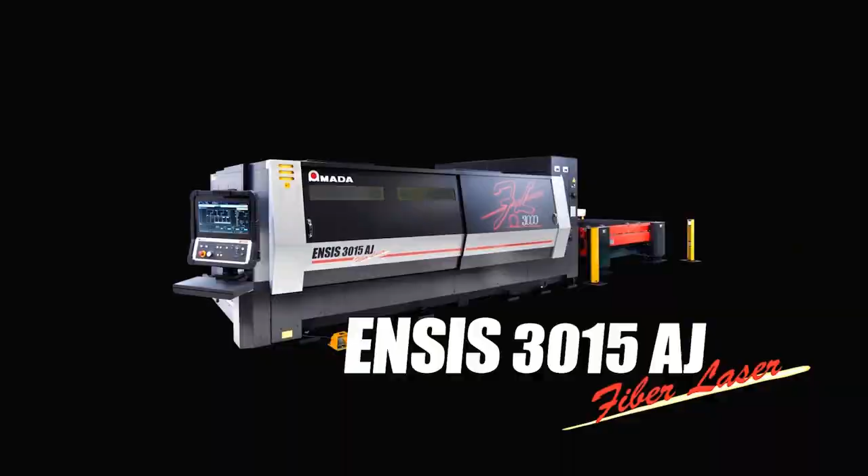IoT-compatible machines bring new manufacturing efficiencies through sensors installed in the machine that monitor changes in real time and send data to the CNC, AMNC for analysis.

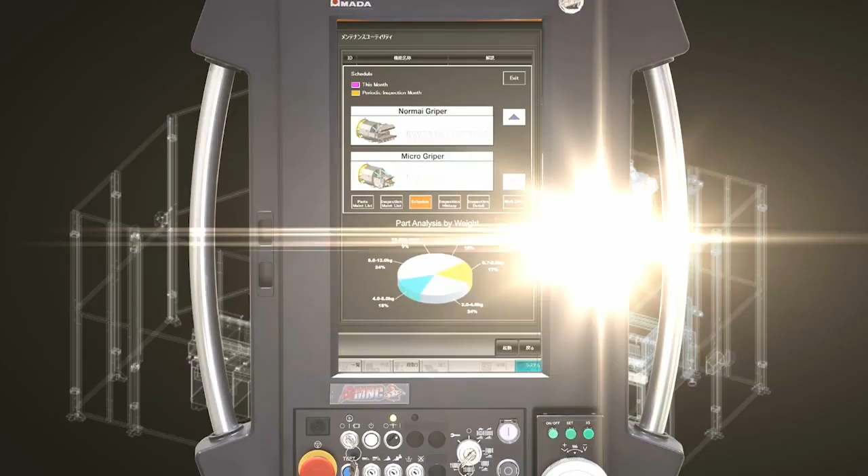The machine autonomously reacts to the analysis, reducing accidents and allowing production to continue without stopping.

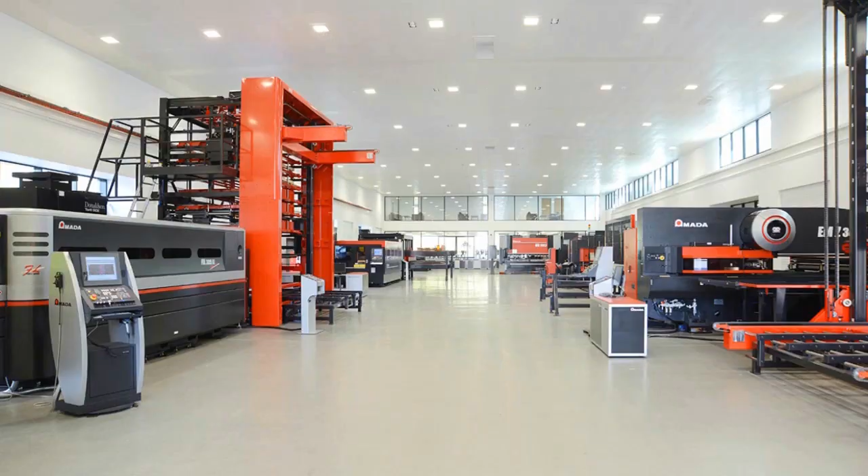We also use AR technology to display factory operating status as digital information to visualize the factory as a whole. This will realize a smart factory which is resistant to fluctuations and seeks out the greatest profit.

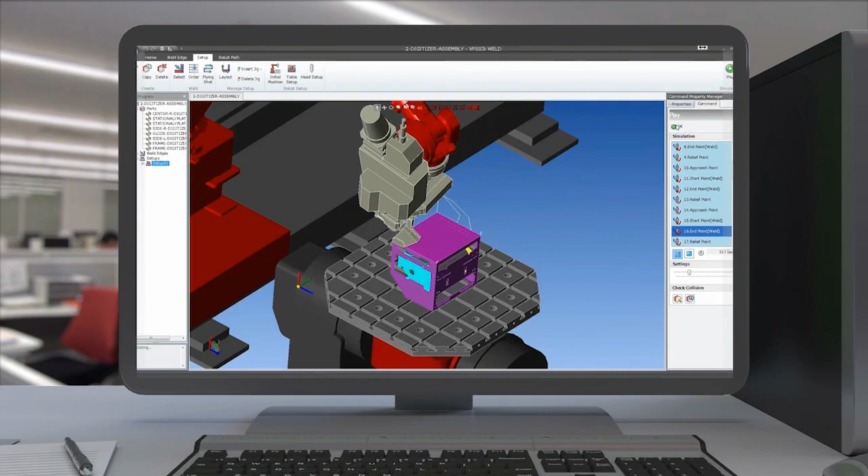Furthermore, before processing begins, VR technology is used to simulate processing from CAD data and optimize the program created. Stable quality and cost reduction are achieved by choosing the optimum processing method at the programming stage and eliminating waste on the shop floor.

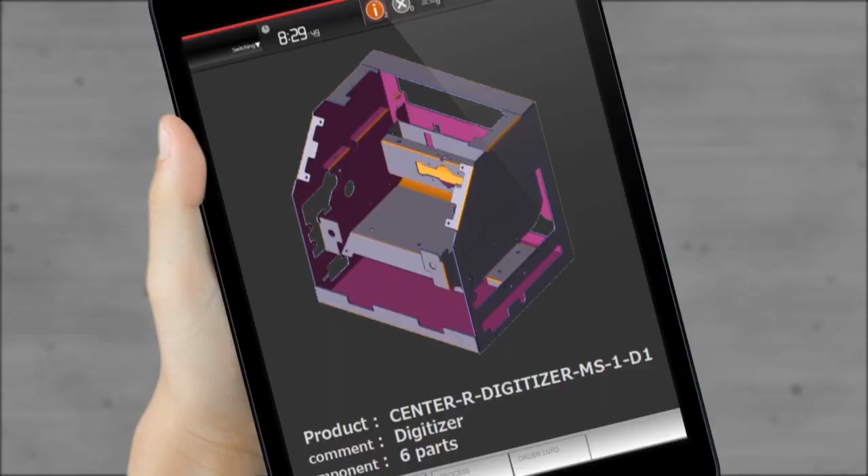Operating and processing data are accumulated in the server via the network. The manufacturing process is visualized, making it possible for everyone to perform high-quality processing.

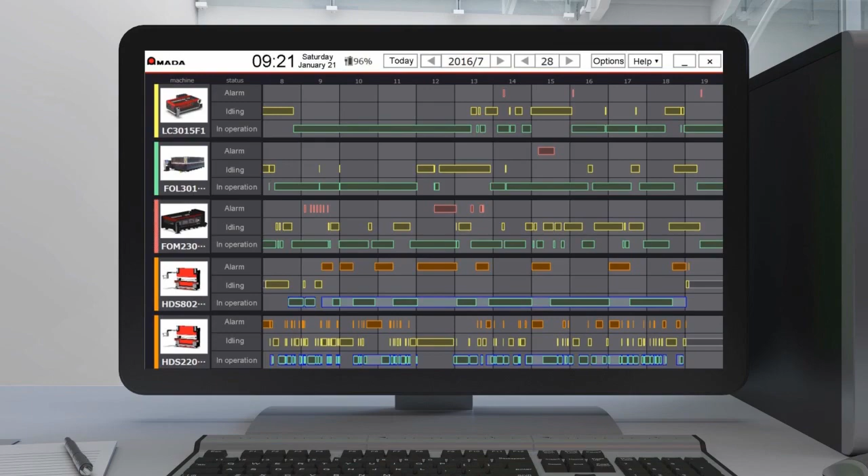During factory production, we can grasp the schedule and the load situation of each process in real time and be able to give accurate and speedy instructions to various problems as they occur. Productivity improvement is expected by receiving a visual operating status of the factory at any time, from anywhere.

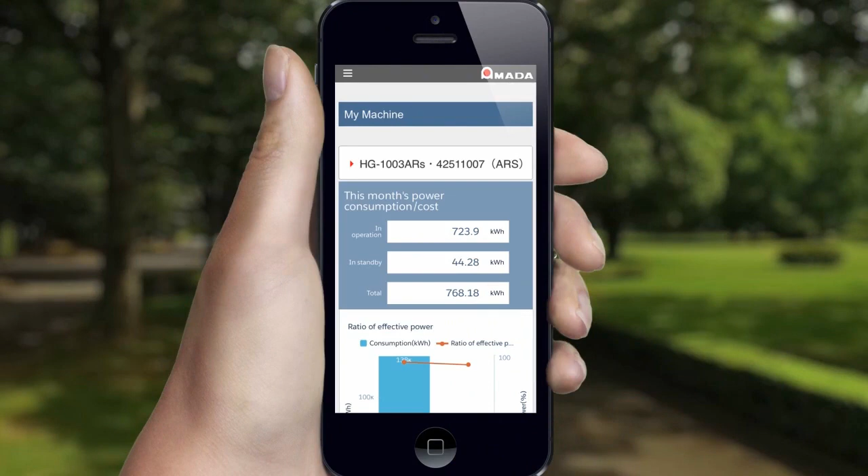Furthermore, by accumulating machine operation and maintenance data in the cloud, we create a large database for analysis. AMADA can also centrally manage the operation status of machines compliant with IoT as a support center in real time.

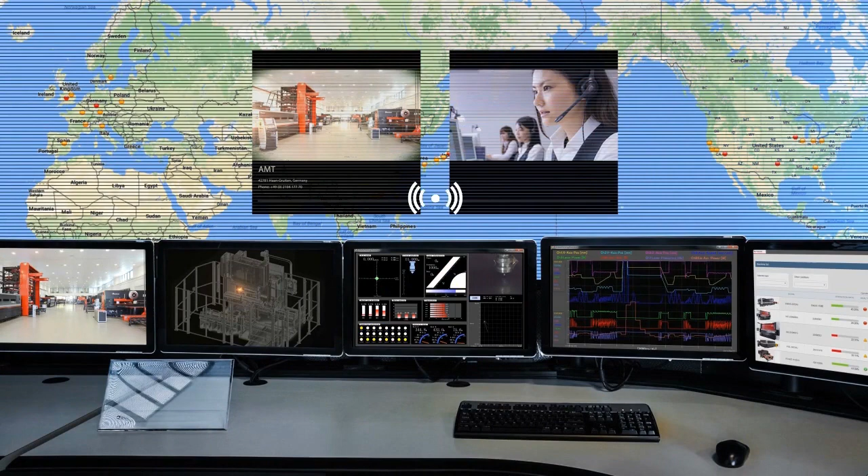In the event of trouble or failures that cause the machine to stop, production can be restored by remote connection, or service staff can be arranged to quickly eliminate obstacles.

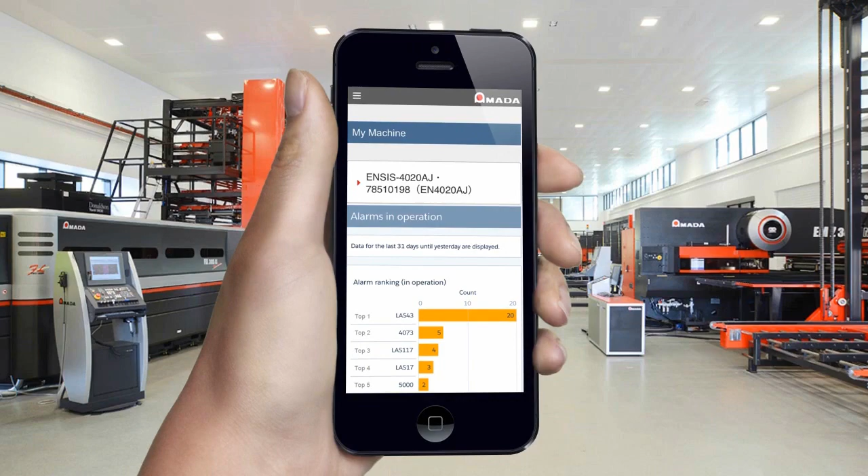Also, the contents of prediction and prevention analyzed by AMADA will arrive at the customer in real time, and we will also notify you of the response to obstacles.

In addition, we can find the optimum processing conditions using the large database from AMADA's processing, and we can offer consulting to improve operations.

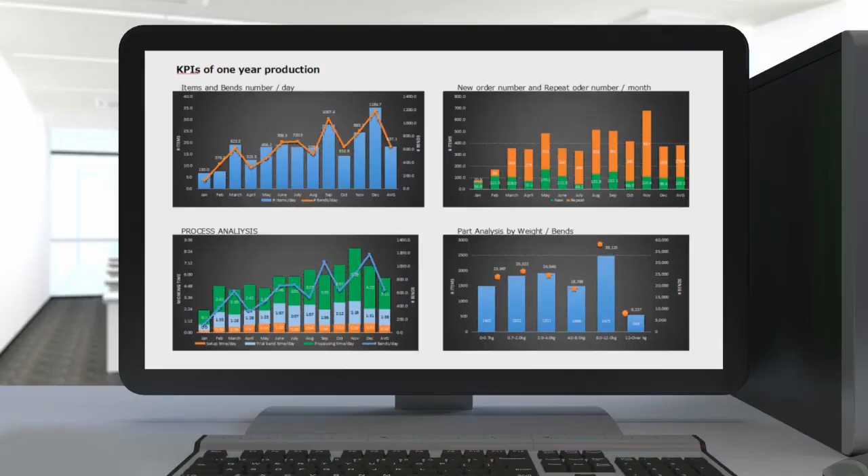Customers can utilize remote monitoring and factory analysis to increase profits.

AMADA's 2 pillars of product and support meet the changing management issues of customers and provide support for manufacturing in the new era.

This is AMADA's IoT V-factory.